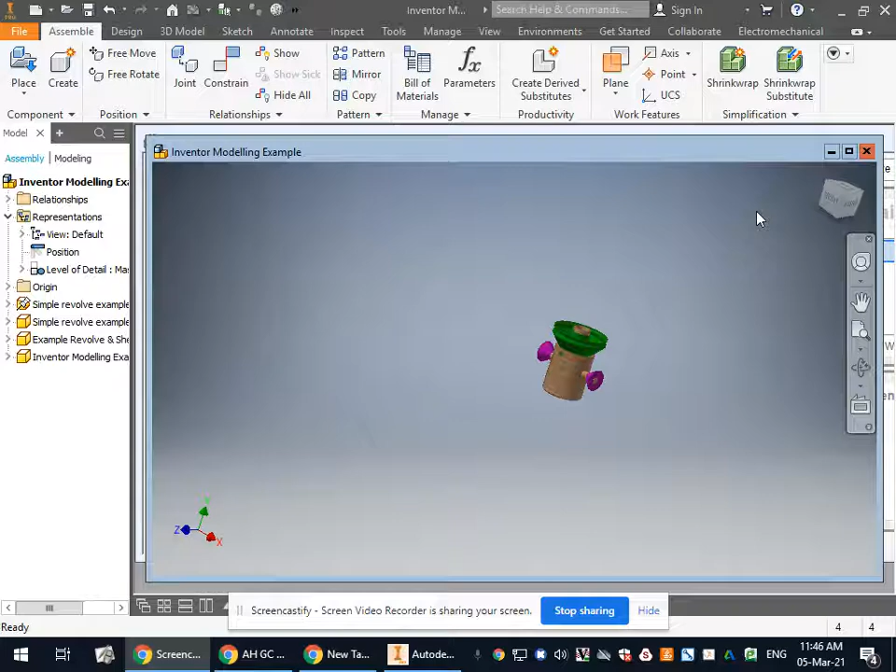If you have a model that you need to create an exploded view of, this is the basic process. Now, as I said before, this model that I'm using here is obviously not what you're making, but the principles are exactly the same, okay?

What you need to do first of all is go to File, New, and within there you will find at the bottom that you have these options here for presentation files, okay? We want the millimeters one.

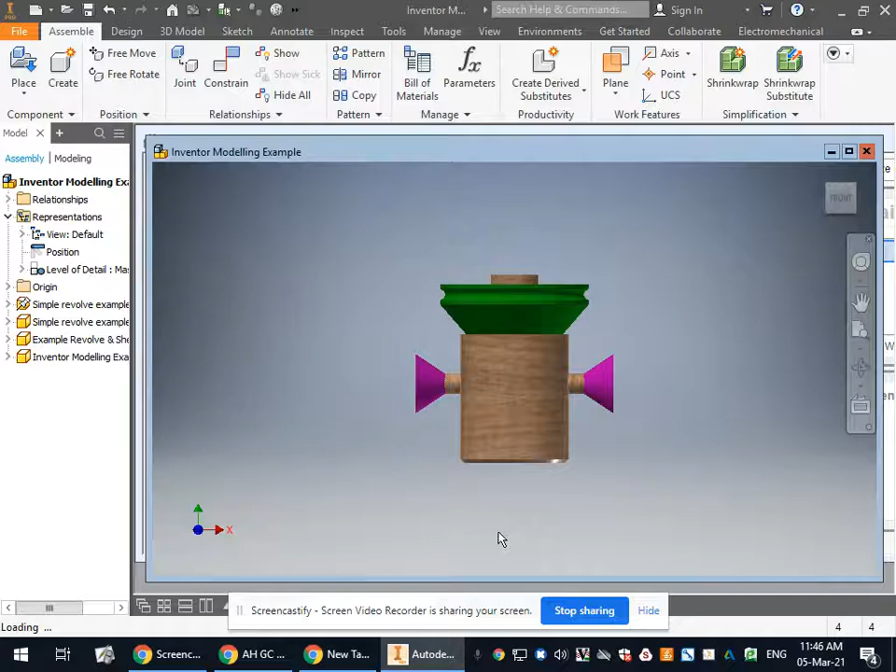And when you've opened that, it will be expecting you to insert a file. So in our case, we want to insert that other file that I just used, which is, I think, this one here. So that would be your assembly that you already saved, yeah? Happy with that?

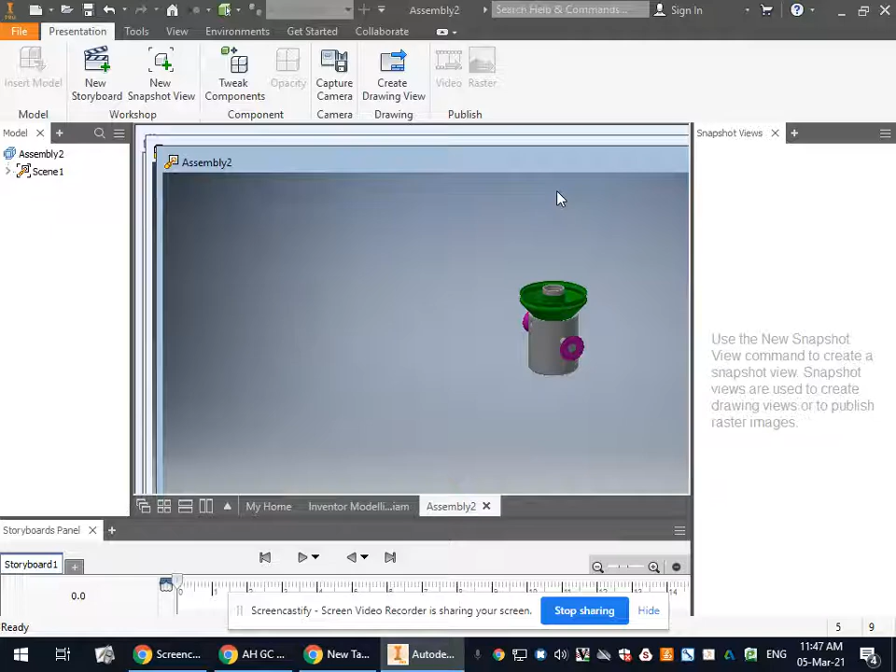Now, what we have is this together currently, so we need to basically explode it. Now, it's a bit awkward on the screen because it's quite a small screen. I'll maybe just get rid of that for now. But up at the top, really, there's only one tool that you need to use, and that's the Tweak Components button up at the top.

If we click that, it allows us to grab individual components and just move them apart, and we can choose to do it on our triad of directions or X, Y, Z axes. So the thing that you need to start by considering is which component is at the core, like what's the bit that's not moving and what are the bits that are being pulled apart.

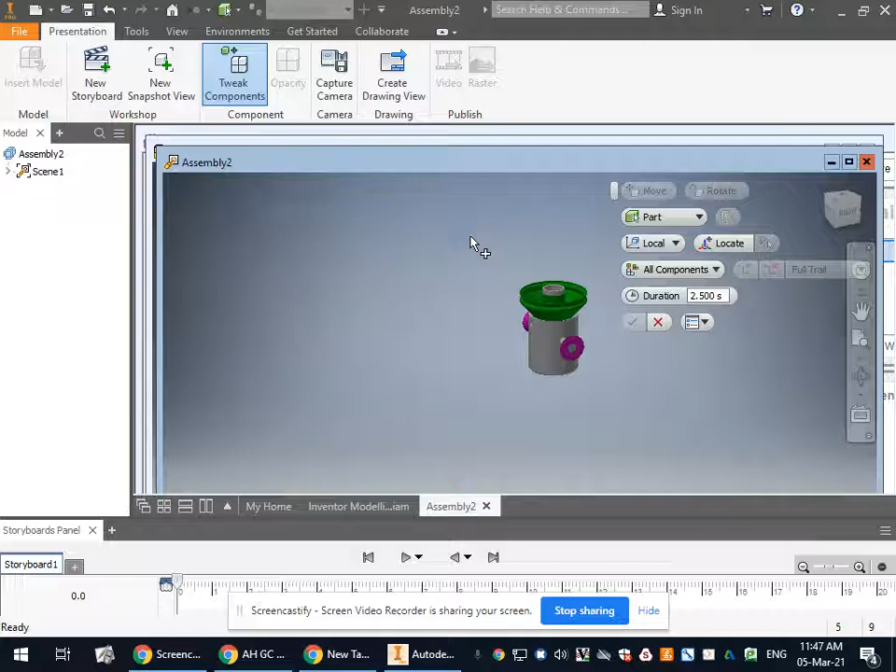Does that make sense? So if you've done an assembly, that will usually be whatever component was grounded, the thing that everything else hangs off. So in this case, that's going to be that part there. So I'm not going to move that. I'm just going to move these other three parts that are affixed to it.

Now, when we actually finish, we'll change it to the isometric view, or we can do it now. It doesn't really matter. So if I go to Tweak Components, I can click on a component, and can you see how it's given me these different directional arrows that I can use to drag it? So I can pull that out this way, and you'll see that it allows me to specify a distance if I want to.

That can be useful where, for example, on the speaker face, you've got the two different parts. You would probably want them both to be out exactly the same amount. So that would allow you to regularize the distances that you're moving things apart so that they're all consistent.

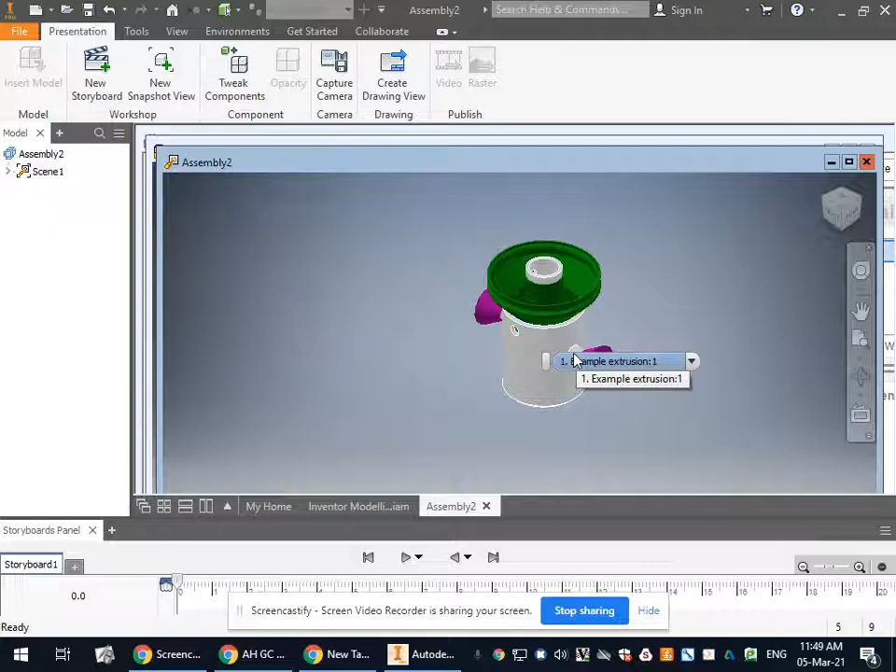The other thing that you can do, though this wouldn't apply to this particular example, is move multiple items. So in the case of your task where you've got the two speaker bezels, rather than moving them one at a time, if you hold Control, not Shift, you can click on several items at a time, and then when we tweak the components, you'll see it moves all of them. Okay?

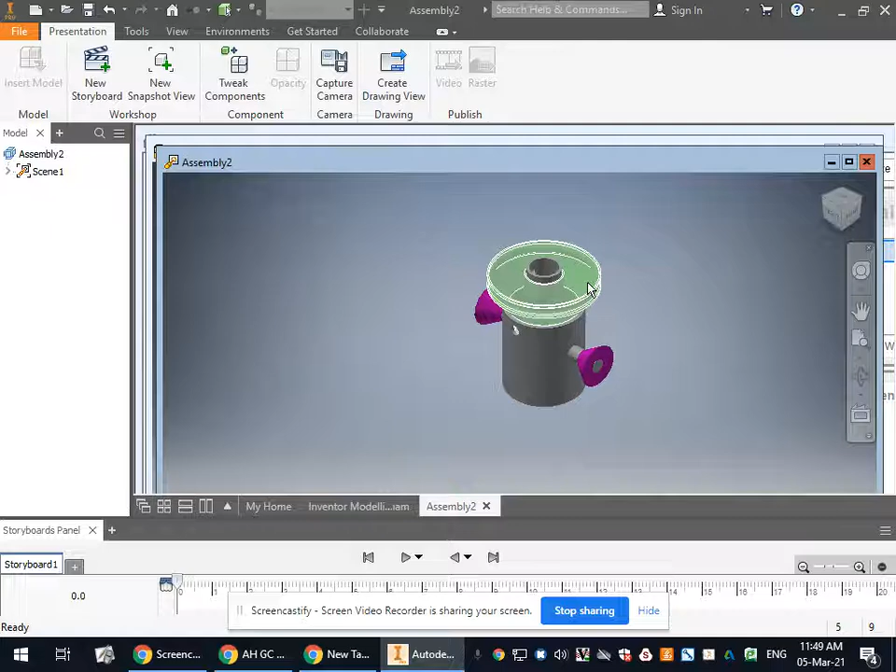Now you wouldn't do that for this because of the way that these are attached. That top part has to be exploded upwards because that's how it would fit together, and these bits here would be exploded to the sides. But you just have to think about your model, which direction would the parts explode in.

And just as an additional piece of advice, if you have a complex thing where you've got your base item and then six different things that need to be stepped out, all spaced out from each other, sometimes it's easier to select all of the things that need to be removed from your base, move them out a certain amount, and then, with the exception of the part that's staying there, select the rest and move them out, so that you're moving them all in a chunk. And each time you move out, you're dropping one of the items.

Because if you've got to space six things out, you have to ensure there's enough space between each item and the last that they're not overlapping, yeah? And so if you just try and guess that, you'll quite often find it really difficult, and you end up having to keep going back and forth and nudging them about.

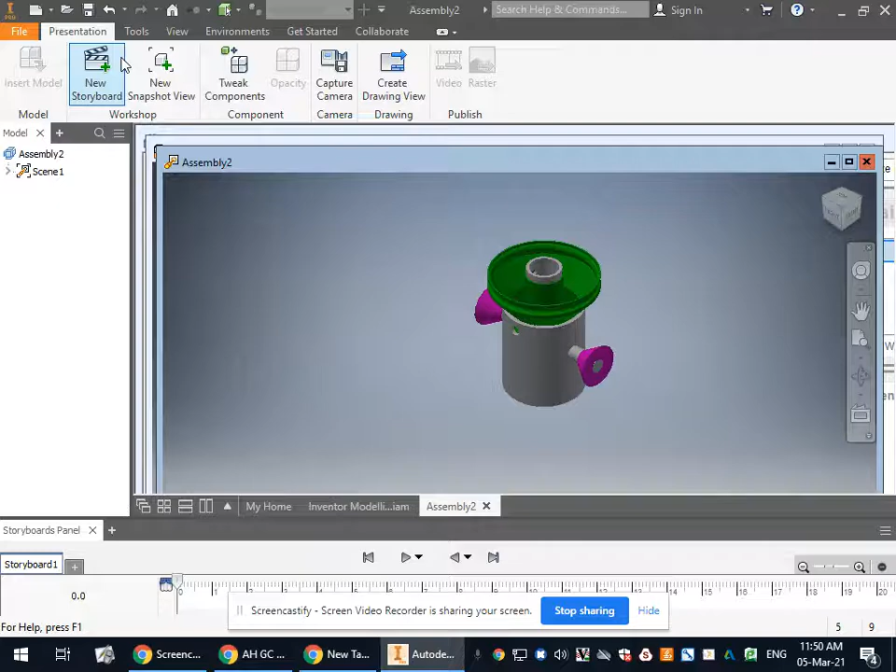Whereas if you just drag everything out and then drop one item, drag everything out a wee bit more, drop another item and so on, you'll kind of space them all out. So anyway, Tweak Components, click your item, drag it, basically until there's clear space between it and the next item. You can specify a distance if you want, you don't have to.

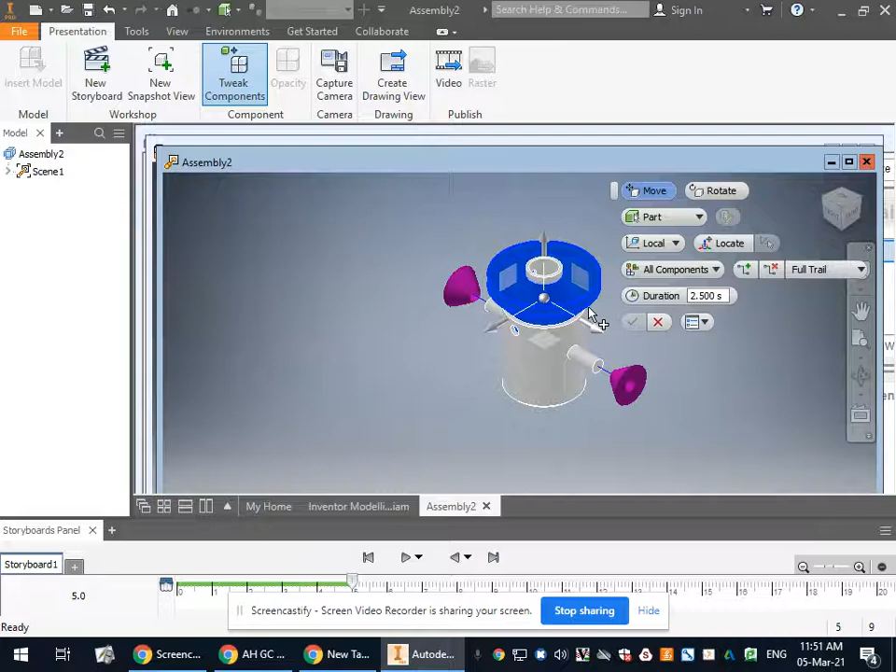Same again, so over here we'd want to drag that out so that it's not overlapping. And then again at the top, Tweak Components, we click on this item, and this time we're dragging it vertically. And for that item, that's it basically done.

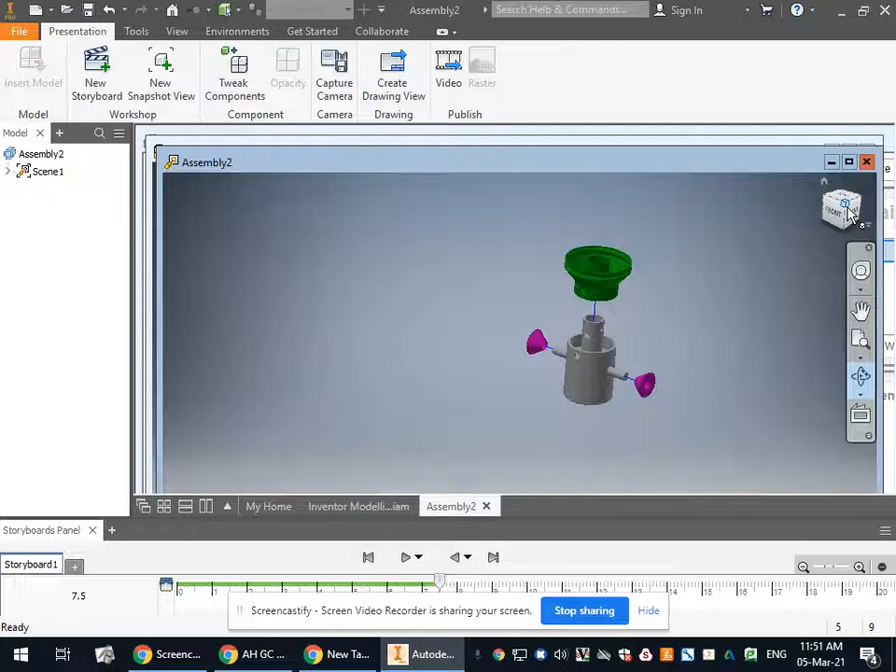Key thing to remember though, if it's an exploded isometric, when you open that presentation file in your drawing, it has to be orientated as an isometric. So if you have used the view cube and you've orientated it round at some weird angle, that's how it will look when you open it in your drawing. You follow?

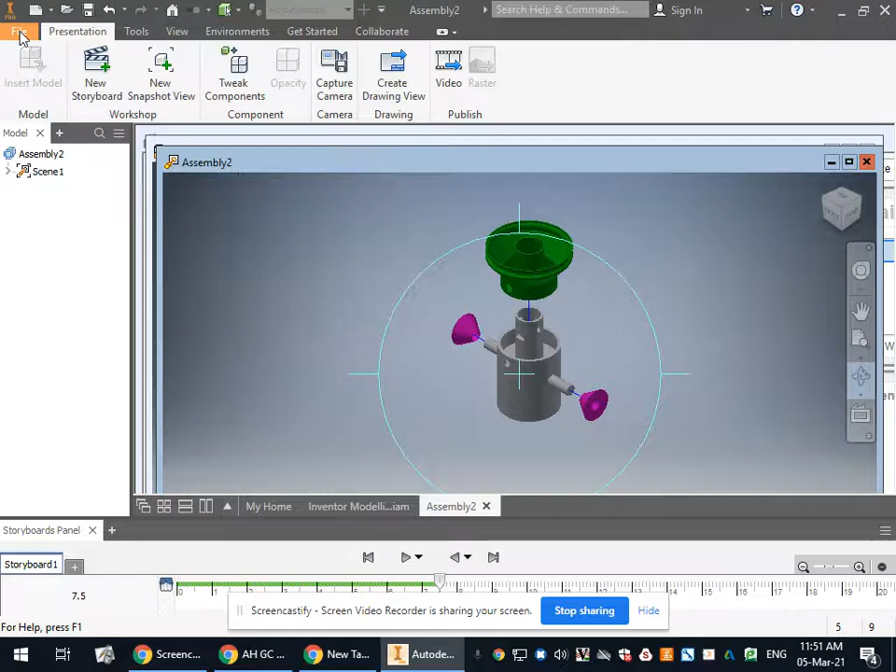So it's important before you save that and move on that you use the top corner of the view cube, which will give you an isometric angular view, and you get it whichever way round you want it to be, because obviously you can change that to that way round or that way round or whatever. So whatever way round you feel you need to have it, get it there. Save it. So just call it assembly 2 exploded.

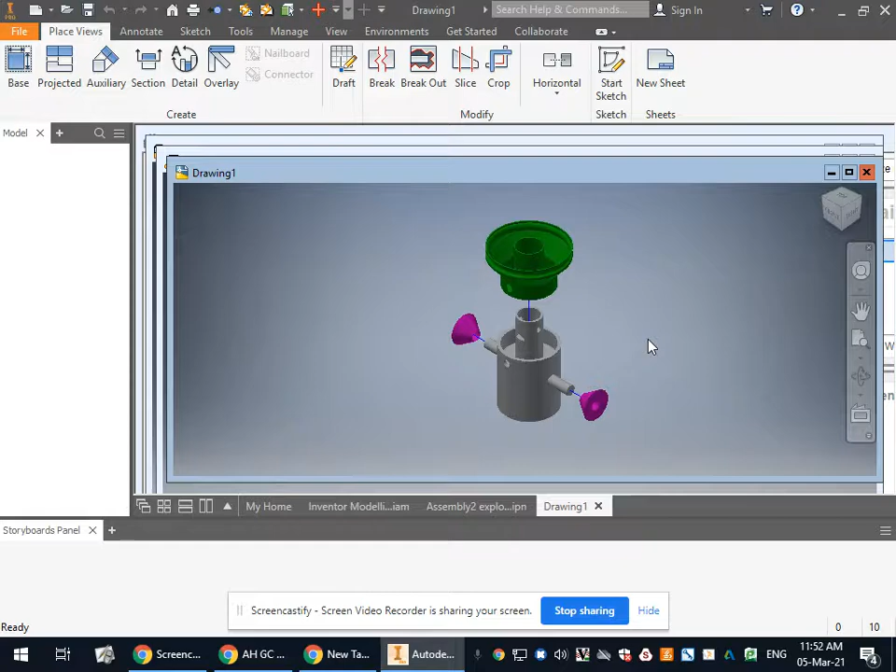Click OK. And then when you go and create a new drawing, or you're on a drawing sheet you've already got, you would just go to base view, and hopefully we've got that IPN file there. Yeah, we see it there. But it's kind of a bit weird. It's not looking quite the way I wanted it to. So if we just go up to the view cube here, we should be able to orientate it the right way. Okay, I think it kind of had that lag when I moved it a wee minute ago.

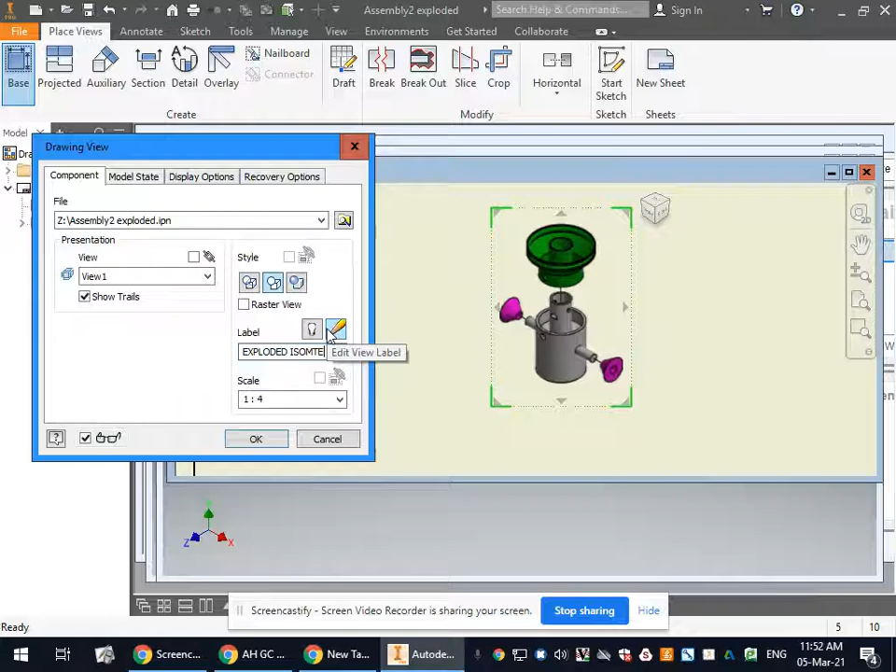And then you'd set it up, so if it's meant to be, for example, I mean, generally it wouldn't be hidden detail, but it'll tell you in the instructions. So we'd want it to be hidden line removed. Maybe add a label. And then if we just tick the wee light bulb beside the label, it will come up with it. And we can grab that label and put it below.

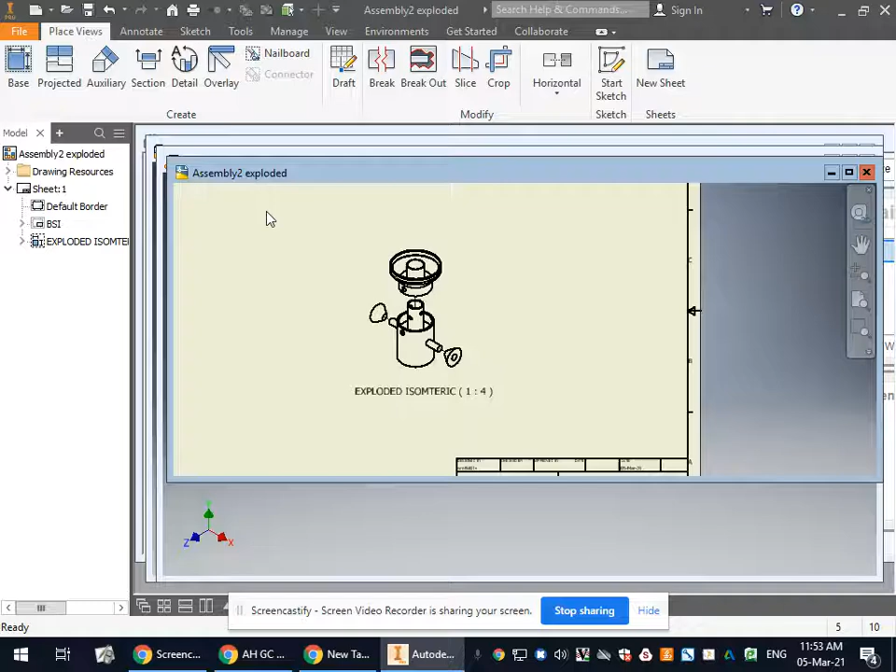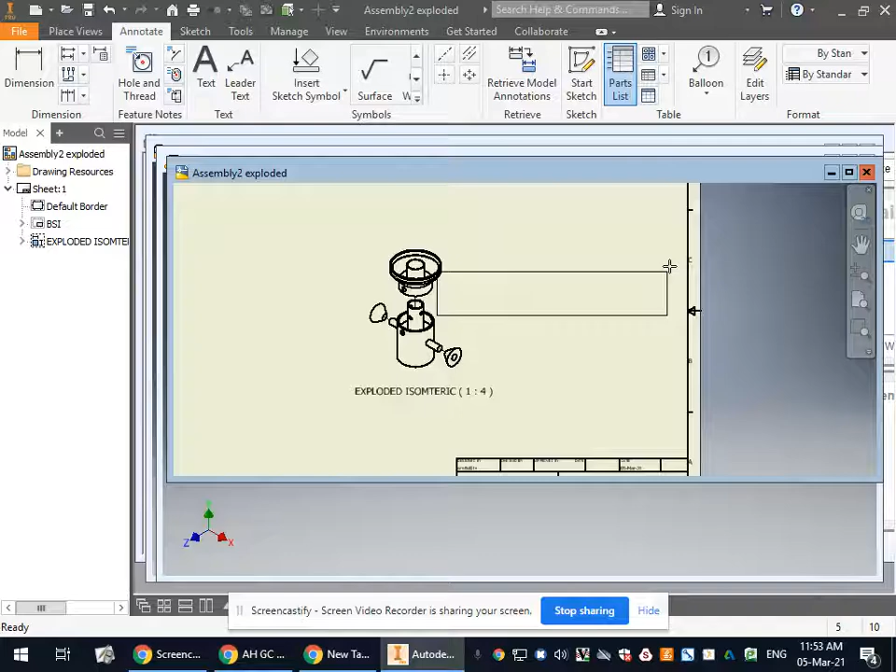Now, one last thing. In the British Standards, one of the things that you got as an option was part numbers. Do you remember when I mentioned that? This is where part numbers can come in, because in Annotate, you can create a kind of a parts list. So we select the view that we want a parts list from, and we'll just say OK to start with. Place that there. So that's all of the items. And you can see it says the item number, 1, 2, 3, and the quantity.

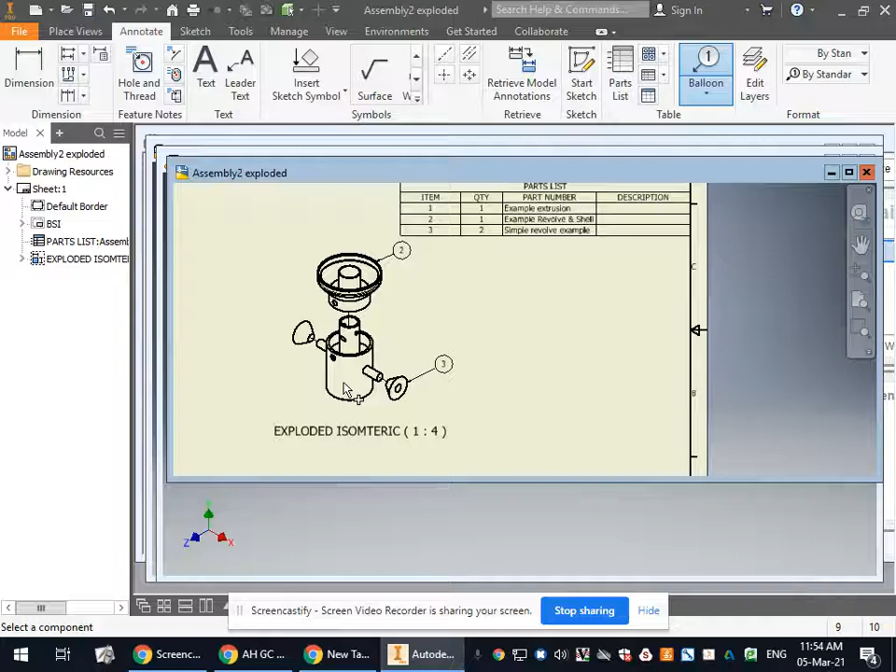And what we then would need to do is add balloons. See these balloons? So this would be, if we click on it, part 2. So you click once, then right click to continue. Part 3. Part 1. Does that make sense?

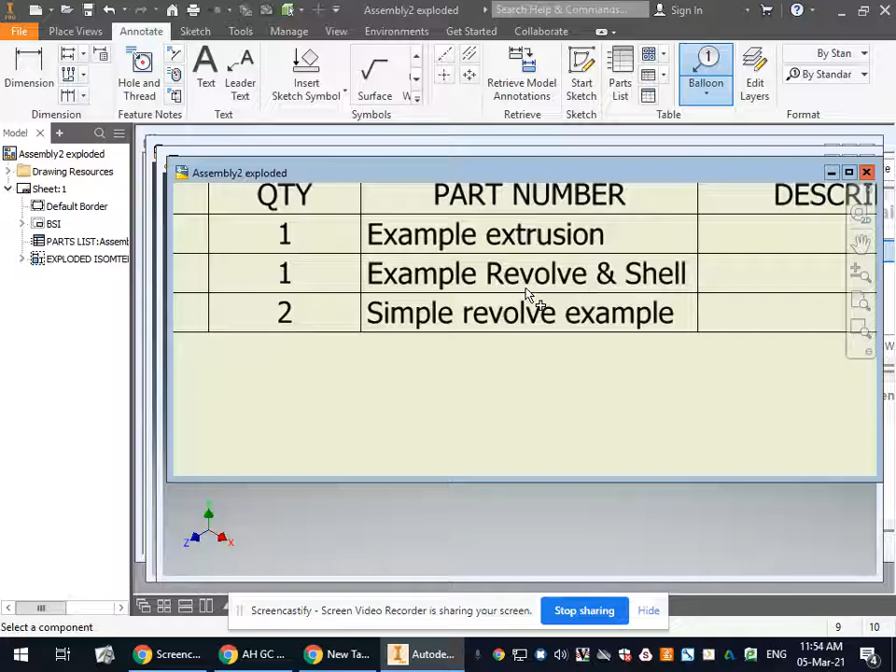You know how I always say, make sure you name your files what the component should be called. That's because when you create a parts list, it derives the name of the part in the parts list from the file name. So if you've called it part 1, that's what its name will be there. But if you've just mashed your keyboard and called it that, that's what will come up there too. Okay, that's why you should always name them.

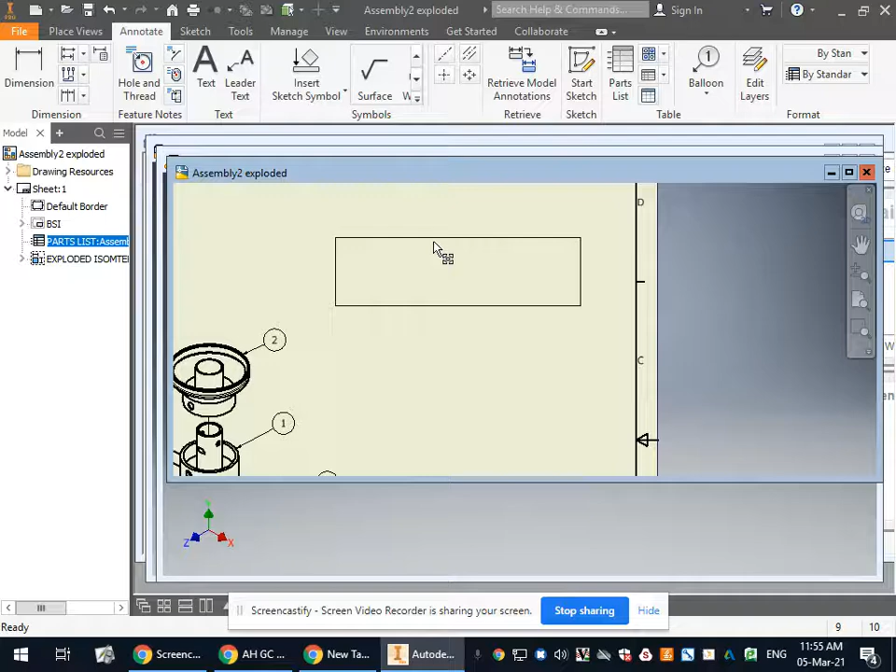Now that table, this isn't really that important for you, but in that table, you can actually go in there and edit it by just double clicking on it. So you can choose what you want to be in the table, for example, which columns to have. That's the column chooser. And I don't want that description one, so I'm going to remove it. And now my table is just a nice simple parts list with the item, the quantity, and the part name or number. Okay?

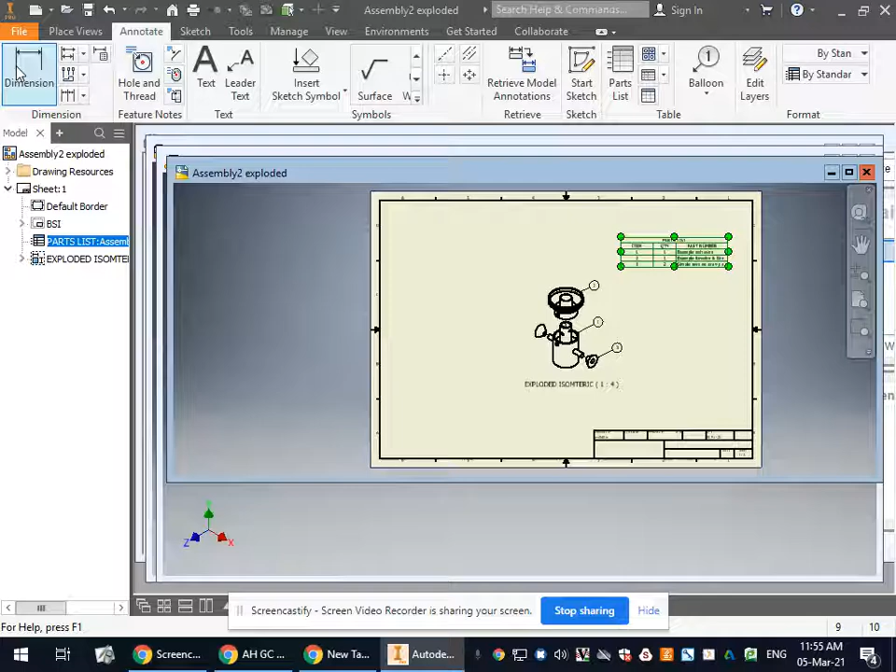So that's you basically done your isometric view. With me explaining it, it took longer, but that would realistically take you 5 minutes after you've done your actual assembly. So you get your assembly done, that's easy marks. Just remember to make sure you save it though, obviously. Okay.